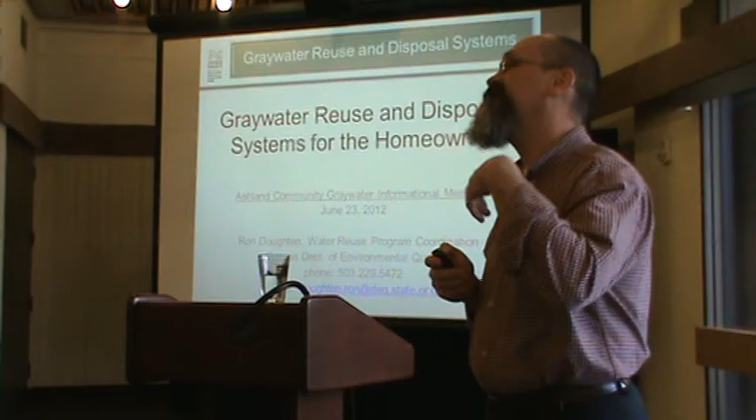And hopefully you will know other places to go and get resources. That's really what I'm hoping.

So very basically, what we're going to talk about is there's a couple of things you need to know before you even get started, and then I'm going to give you 9 steps to reusing Graywater.

I've also put a key on here. The key is important because, as I mentioned, you have to get a permit from DEQ, and places where I put a key are things you actually have to put on that permit application. I highlighted those so you know what you'll need on your Graywater permit application.

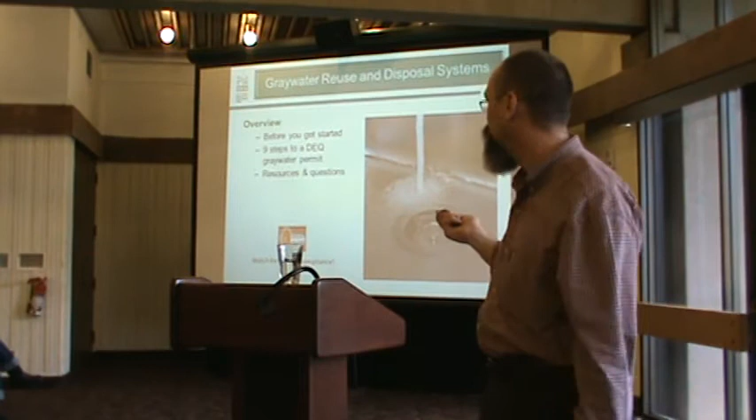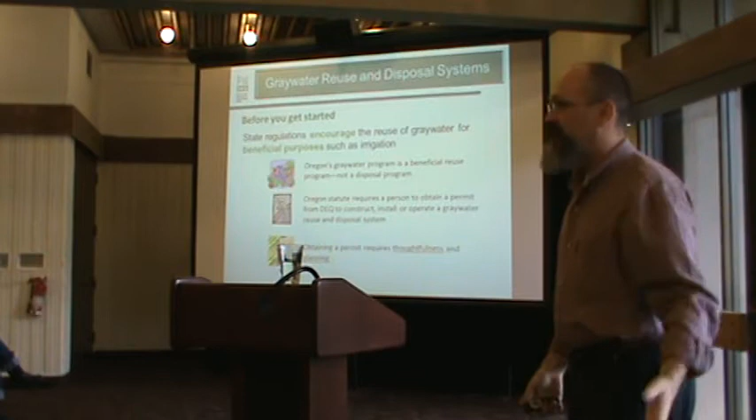All right. So as I've already mentioned, it is state policy to encourage Graywater reuse. The things you need to know: first, this is a reuse program, not a disposal program. I've had people contact me who have a house in the hills and can't qualify for a septic system, and they want to put in a Graywater system. I can't help you, because this is a reuse program, not a disposal program.

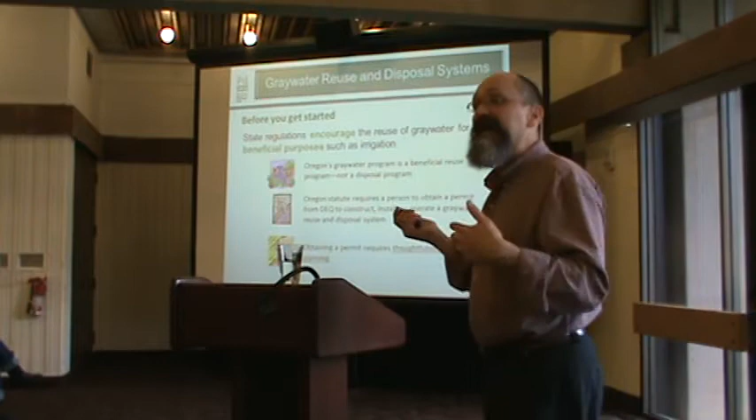The second thing is that you have to get a permit, as I've already mentioned. We're trying to keep that permit easy and basic to get, so it's not very onerous. And lastly, getting this permit and going through this process, we're trying to make it very simple, and I think it's actually pretty straightforward and easy. Sometimes it's going to sound complex, but I don't think that it is. It just requires that you're thoughtful and do some planning.

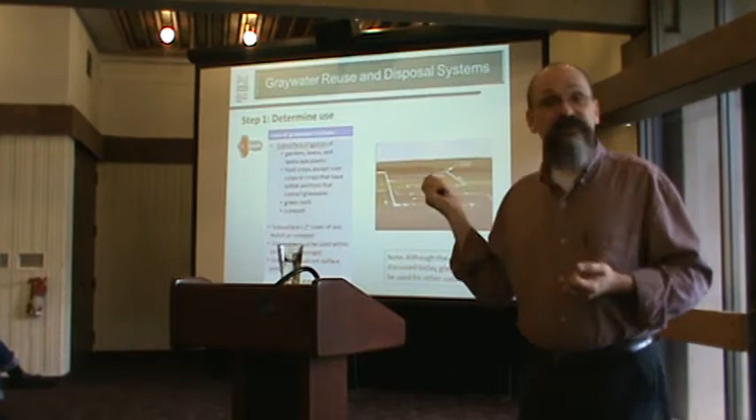Okay, we've already covered this. Subsurface irrigation: on your permit application, there are 4 things under subsurface irrigation that you have to choose, and on your application you actually have to identify which of those you're going to do. It doesn't mean a whole lot of difference if you check one and not the other, it's just that we ask that you do that.

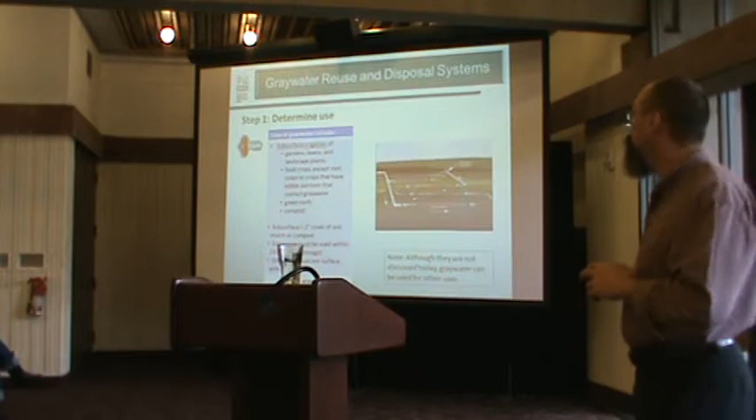You can check more than one? You can check more than one. Yeah, you can choose, like if you have 2 different sides of your house. Absolutely, you can choose one or all 4 of those different ways of reusing Graywater for subsurface irrigation.

Once again, the reminder: 2 inches of cover. We try to keep that very simple so that if you put in a system and want to move it, you can find your hoses, pull them up, and move them. That's for people who want to do vegetable gardens and things like that. And the Graywater 24-hour limit is something to keep in mind as well.

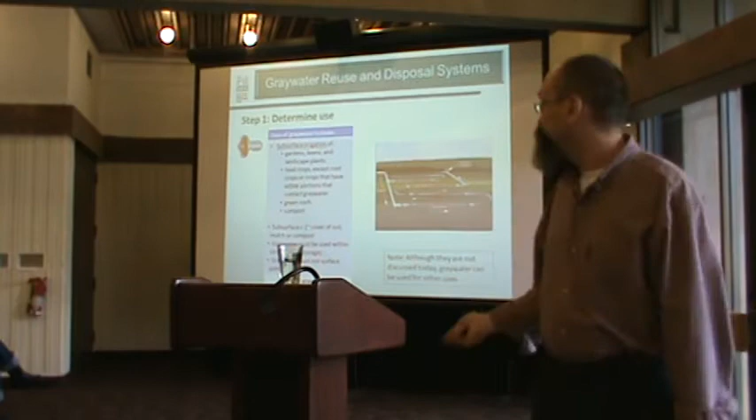All right, here's our key. So, second step: you've determined how you want to use it. The second thing is to figure out where you want to use it. I've gone through some of these already.

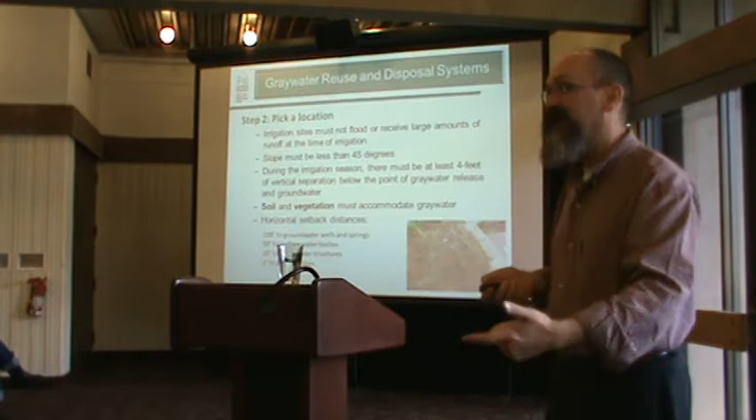So the site you choose can't be subject to flooding or on-site runoff at the time you're using your Graywater. If you're using it in the summer here, barring heavy rains like yesterday, you shouldn't have any problem reusing Graywater in the summer naturally.

Are all of these kind of requirements in the permit, or should we be writing this down? All of this stuff - there's a handout called Reusing Graywater in the Landscape. Everything should be in there. Okay, great. Yeah, including the 9 steps. Okay, it follows that very closely.

Don't put it on steep slopes. Slopes have to be less than 45 degrees. That's pretty steep.

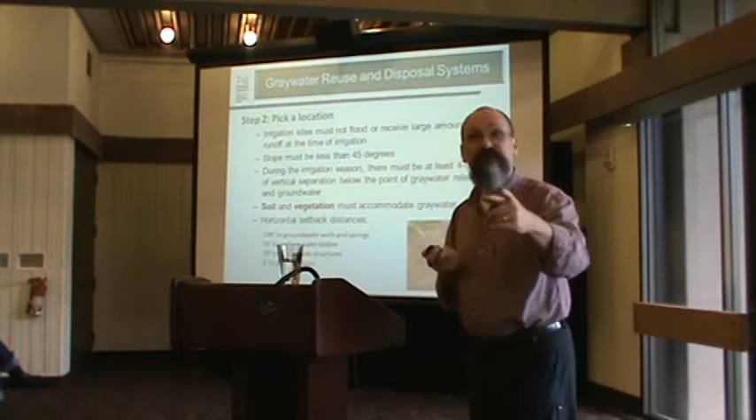During the irrigation season, there's the 4-foot separation - I think that was asked a little bit ago. And your soil and vegetation must accommodate your Graywater, so you just have to have an idea of how much water your plants need and make sure that area can accommodate it.

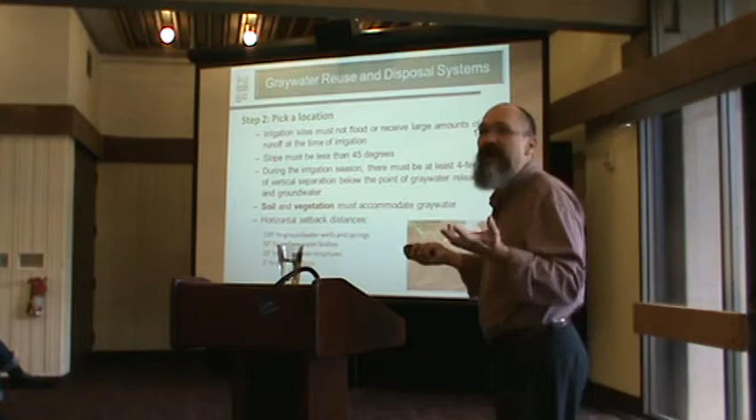We've had people talk about their little planter boxes, wanting to put 100 gallons per day in it - you can't do that, so it's just practical. For the slope less than 45 degrees, is there a reason? Yeah, the issue there is stability. Once again, this isn't about irrigation being the focus, but there are concerns because it's subsurface and you can't tell when it gets too saturated, so it's just a slope stability issue.

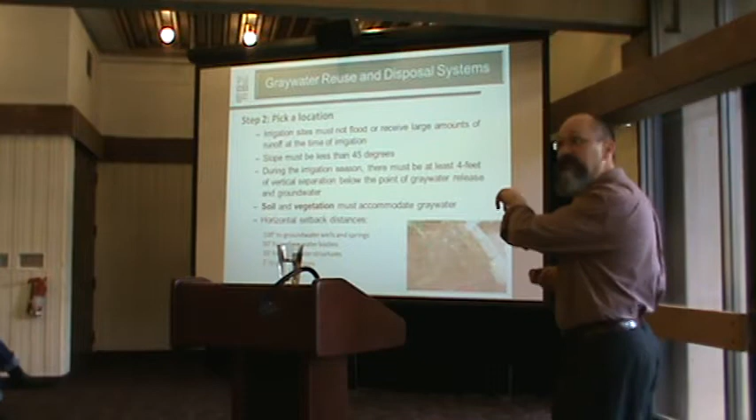There are horizontal setback distances to what we call sensitive features. If you have a well on your property, that's 100 feet; 50 feet to surface water bodies, so if you're near a stream, bear that in mind. 10 feet to stormwater structures—again, you're just trying to keep the graywater from getting into the stormwater systems—and 2 feet to property lines.

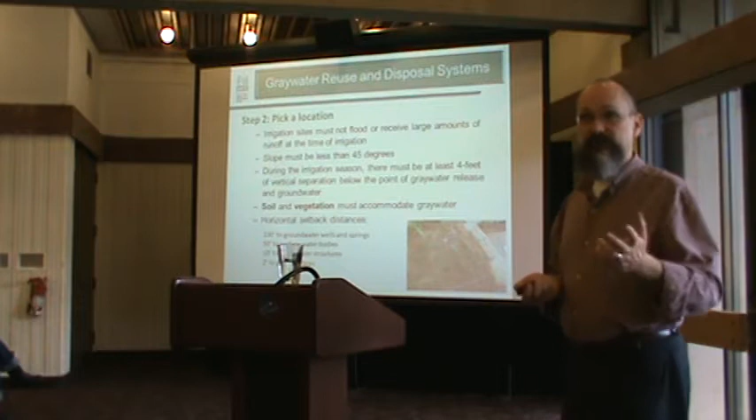Now, you can cross property lines if you generate graywater and your neighbor wants to reuse it—you just need an agreement with your neighbor. Or the other way around: if your neighbor is generating the graywater and you want to reuse it, you can do that too, but you need a written agreement.

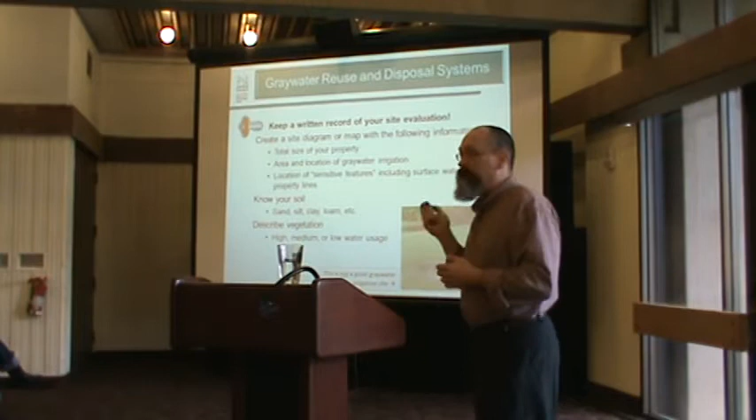So, keep a written record of your site evaluation. This is just something that says create a map or diagram of your property, know your soils, describe your vegetation. Keep this very simple. This is where resources like soil and water conservation districts can be very helpful, particularly for soils, helping you know what types you have.

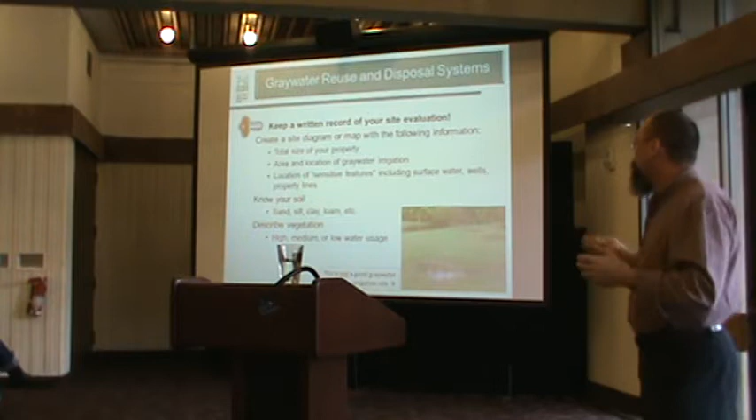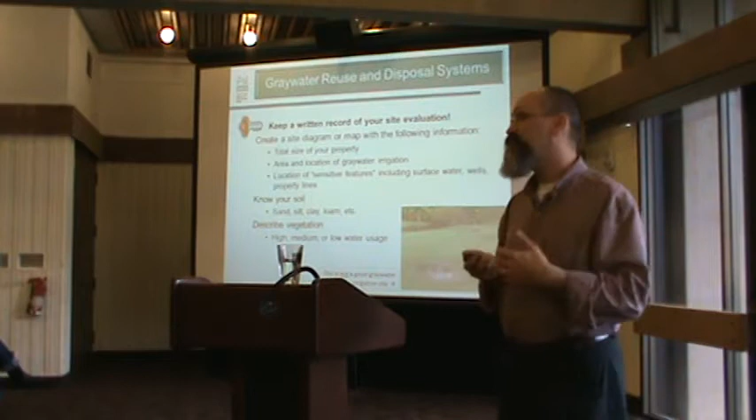Talk to people—landscape professionals, talk to nurseries. If you're putting in new vegetation, how much water do those plants need? As a general rule of thumb, lawns in the summer in Oregon need about 1 inch of water per week, and you can base how much water you need on that.

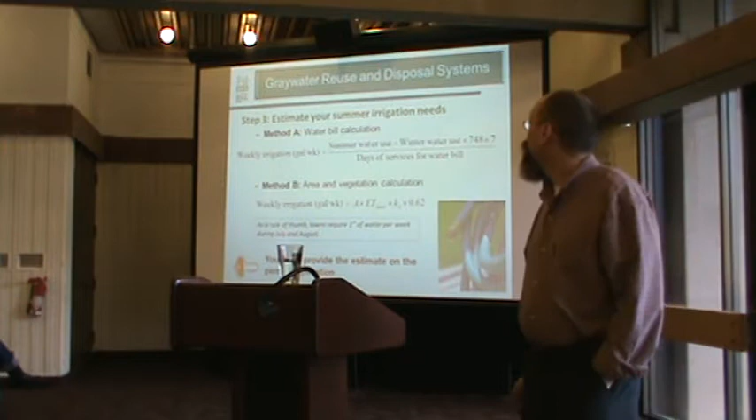So the next step is to estimate your summer irrigation needs. Again, this is much simpler than it looks. There are a couple of ways you can do this.

If you have an existing structure and want to know how much water you need to irrigate your landscape, you can pull your water bills. The difference between your summer and winter water bill can be used to calculate how much water you need for irrigation in the summer. So that's one way to do it.

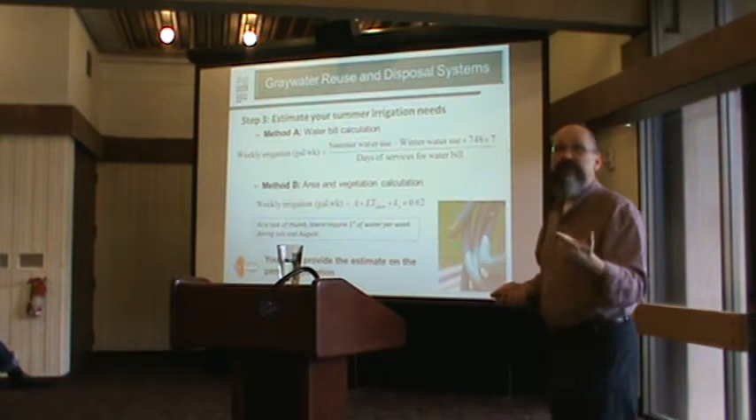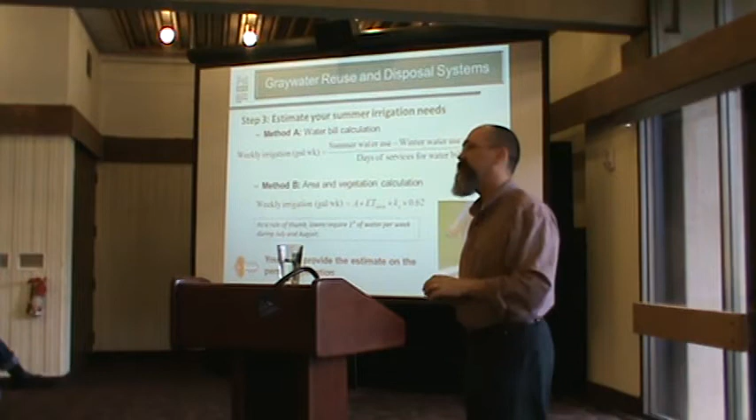The other way to figure out how much water you need for irrigating is to actually do a calculation based upon the area, the amount of water transpired by the plants, and some factors to get it into gallons per week. There are people out there who can help you do this if it's complicated, and I think the guide talks about ways of doing this too, with examples. It really isn't that difficult to do.

You speak about lawns, which I'm not really in favor of anyway. Right, but you say nothing about just keeping your lawn higher, so it would use less water.

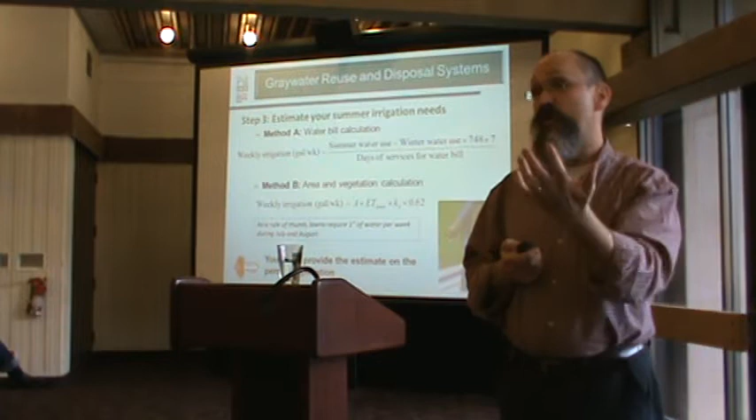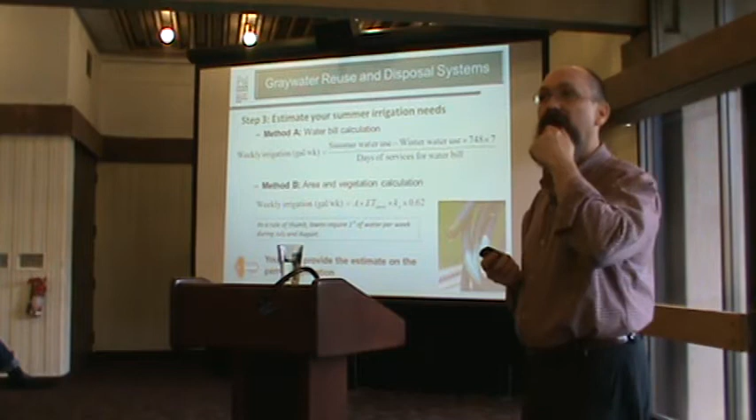Well, that's true. I bring up lawns only as a point of reference, because one of the tools people often use talks about how much water you need to put on your lawn. Like in the Portland metro area, there's a website where every week you can put in your zip code and it tells you how many inches of water to put on your lawn. You can use that number to calculate how much graywater you need—that's the point of using the lawn as a reference.

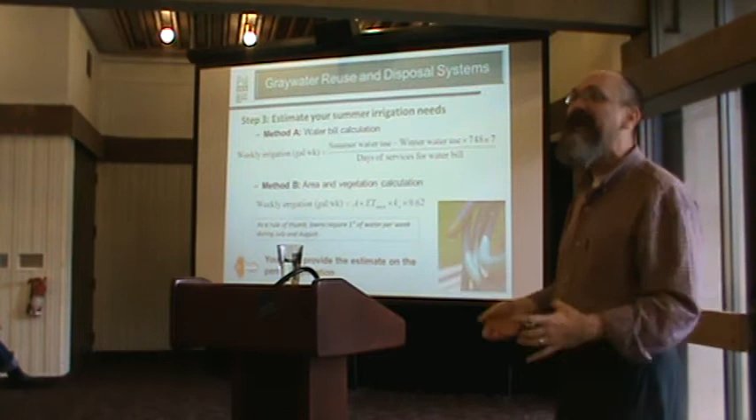I read that if you just collect your water in a bucket and use it that way, you don't need a permit. If you move it inside your house, I mean—if you use it inside, yes, you can't take it outside. That's the strange thing: when the legislature passed this law, it was for taking water outside of your house, so it doesn't specify how you get it outside. We assume most people will run plumbing, but technically, if you have a bucket and you're taking it outside, that is permitted.

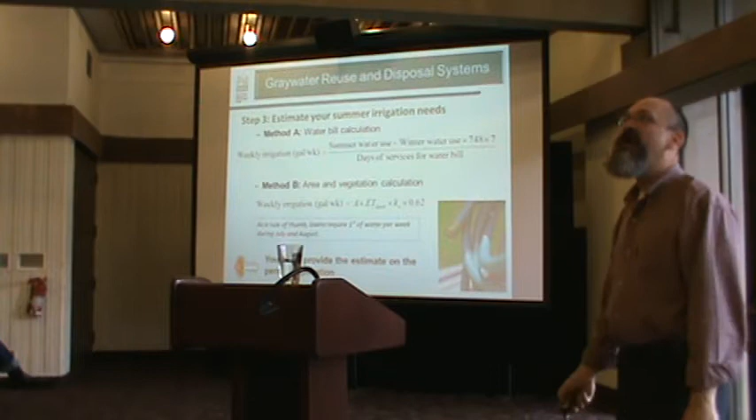This estimate of how much gray water you need doesn't have to be precise. It just needs to be a ballpark, like estimating that you need 70 gallons per week to water this area in the summer. That's it. These can be pretty big, general numbers.

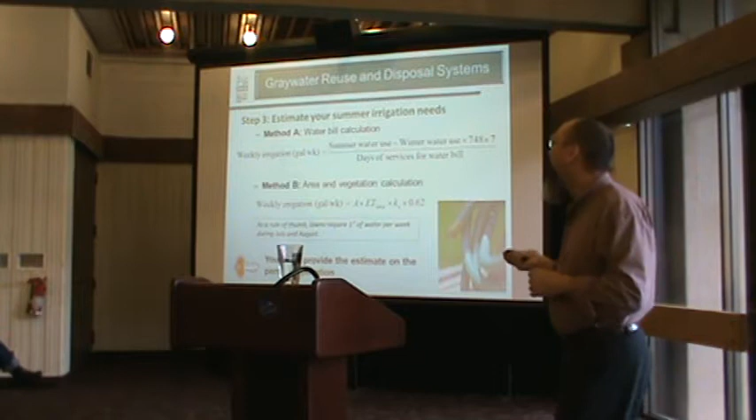Question: are there any state, county, or city incentives at this point to influence people? No, not yet. Are they being talked about? There's nothing that DEQ can do on our end, unfortunately.

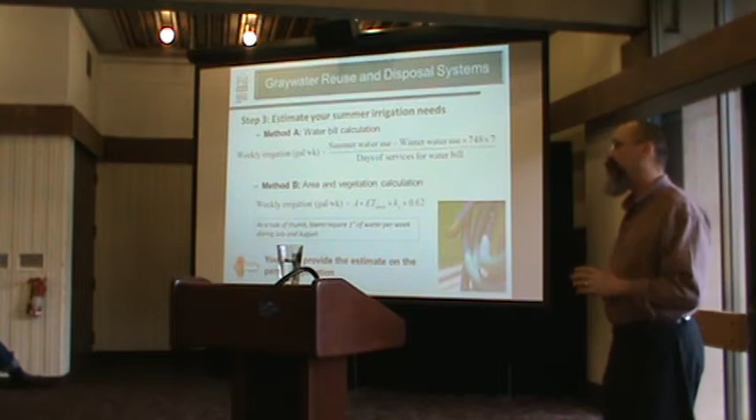The only mechanism we have is to deal with fees, that's all I have to play with, their permit fees. So we've tried to do that by waiving the annual fee in most years. That's how we're trying to help, but our hands are tied. If you're looking for incentives locally, you'll need to talk with the local jurisdiction.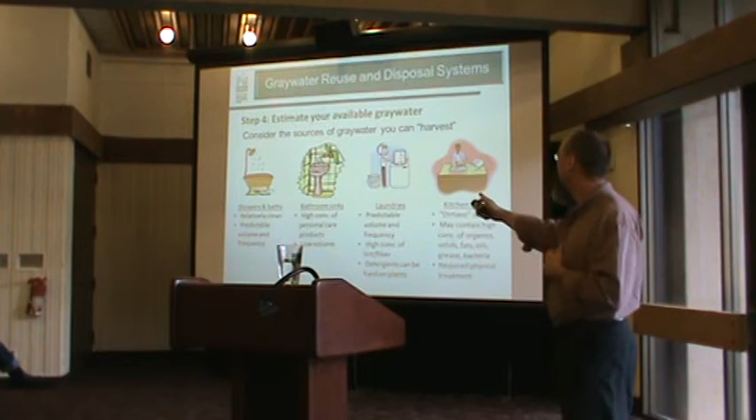So step 4 is estimate your available gray water. Once again, there are four different sources. Two of them are really good and easy to do: showers/baths and laundry, because they're so predictable, and you'll know how much water you produce from those. Estimating your gray water flow is a pretty straightforward process.

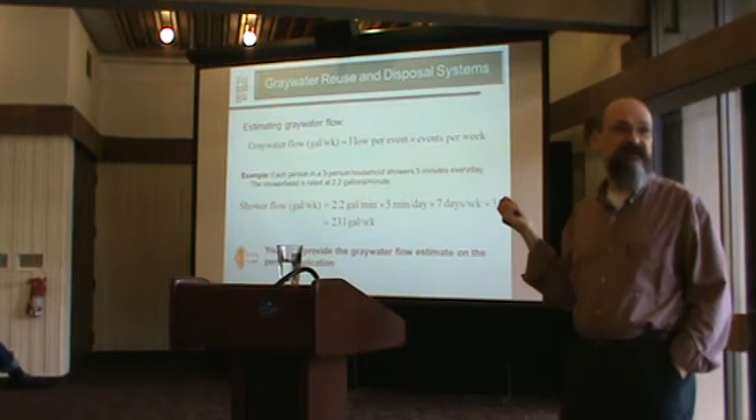The idea is how much flow you have per event, and how many times that event occurs every week. For example, 3 people showering 5 minutes every day with a shower flow of 2.2 gallons per minute comes to 231 gallons per week. It's a pretty basic math calculation.

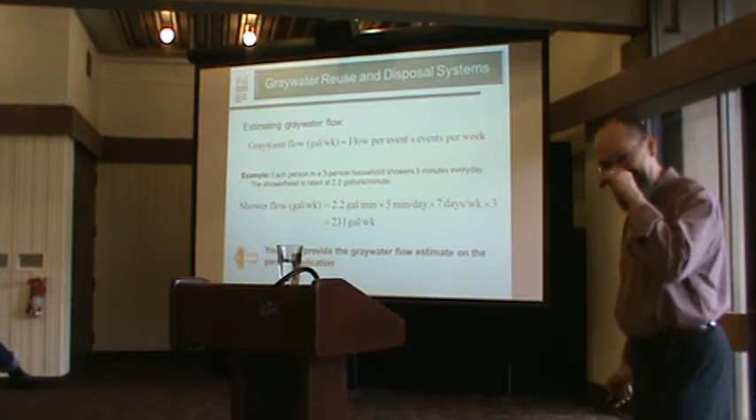What's a full bathtub? I don't know, you'd have to figure out your bathtub. Do you know? No, I wish I did.

Once again, that number does go on your permit application. It's ballpark, it doesn't have to be exact or precise.

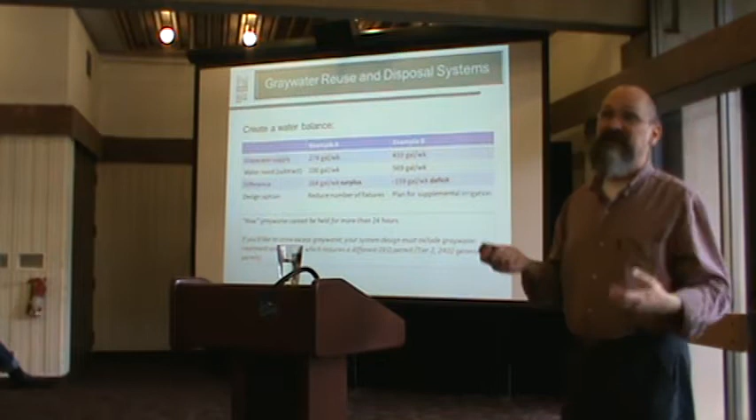The next step is to compare how much water you need to irrigate with how much gray water you're producing. Just look at those two numbers. In some cases you might have extra gray water, in which case you might decide not to collect from your bathroom sinks, reducing the number of fixtures on your gray water system. Likewise, you might find you need more water than your gray water produces. That's okay, you just need to plan for supplementing it, using some potable water supply if needed.

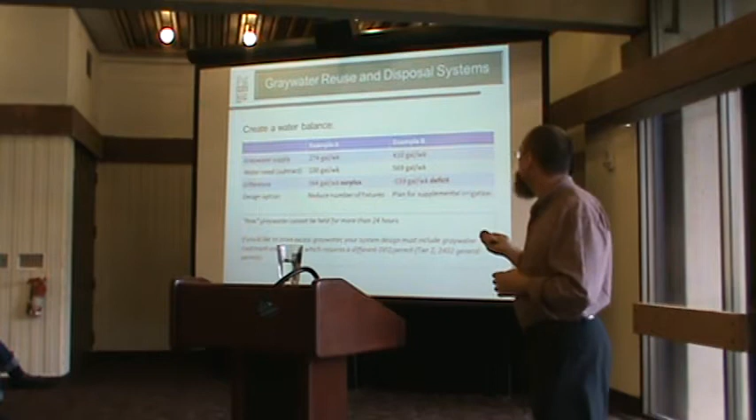Step 5: design your gray water system. You've collected all this information together, and now it's just a matter of putting it down and figuring out what it's going to look like, so you know which fixtures you're going to use.

You need to have some kind of diversion device, a way to divert the gray water from irrigation to the sewer system, assuming you're on a sewer. Where are you going to put that? Where will it be located in your house? You can have one diversion device, or a diversion device at every fixture in your house. It's up to you to decide how you want to do that.

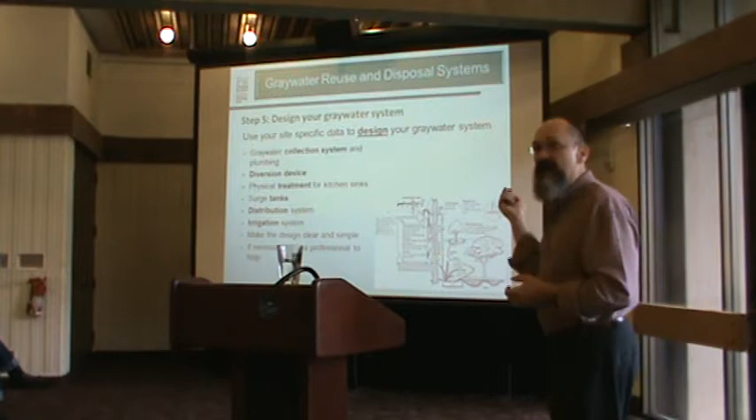If you have the kitchen sink, we talked about having some sort of physical treatment process, something to think about: where is that going to be located? Are you putting a grease trap under your kitchen sink, or putting something outside your house? These are all design considerations you need to think about if you want to do kitchen sinks.

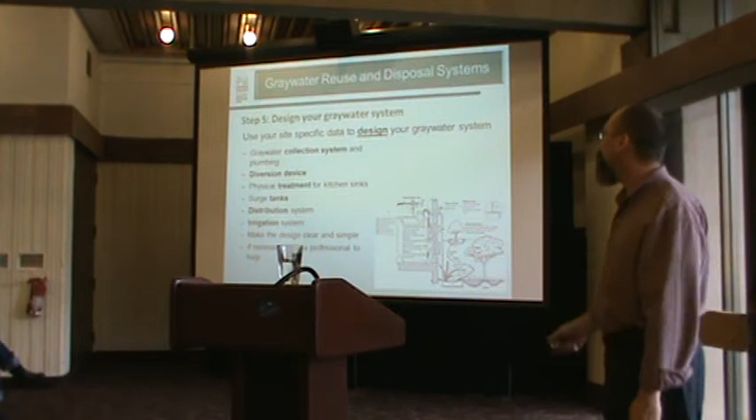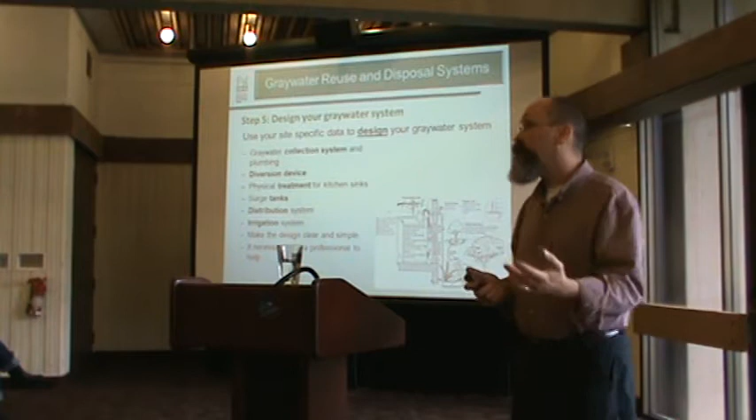You can't store your gray water, but you may want to put in a surge tank, maybe a 55-gallon drum, since your washing machine pumps out all this water at one point in time, and it's maybe hot, so you want to slow it down and let it cool before putting it out on your landscape. You don't have to, but you may want to. It's just something to consider.

For your distribution system, the idea is just to think about how you're going to get the water from the house out to wherever you're going to use it.

Are you going to do buried pipes, or are there different ways to do that? Going back to the diversion device - I've got a very small crawl space, and I'd like to have an electrical switch so I don't have to crawl into the house to change that. Is that doable, and any idea how much that would cost?

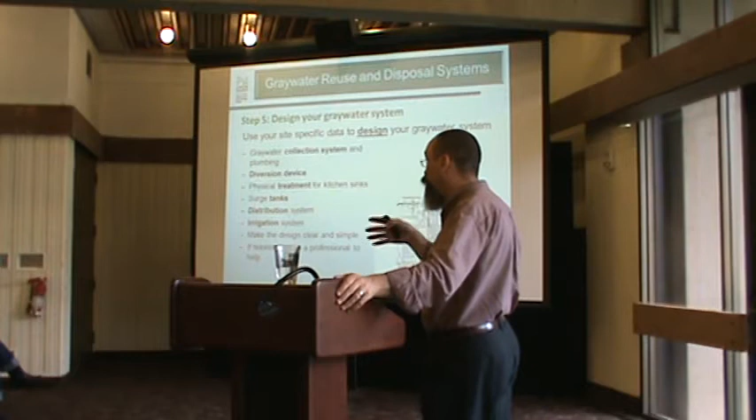I don't know how much it's going to cost, but if you can control where that flow goes, as long as your ability to control it is readily accessible, I think that's fine. The idea with diversion devices is that it should be readily accessible. There's that thing about crawl spaces - if you're washing dirty diapers and you need to send it to the sewer, you don't want to crawl into your house to switch that. So there's some way that you can do that.

So, system design. There are lots of things to think about, but they're pretty practical things.

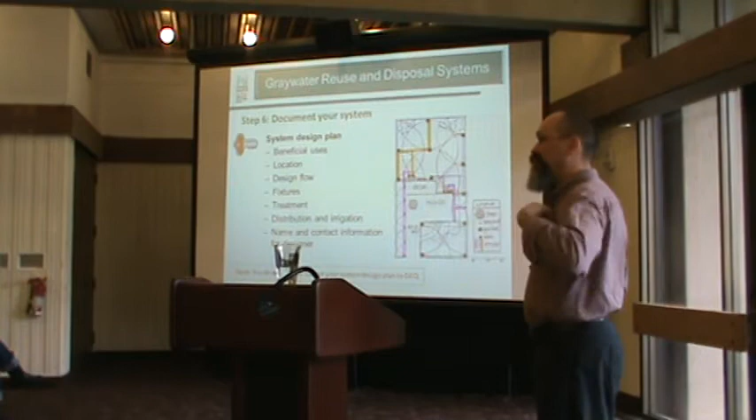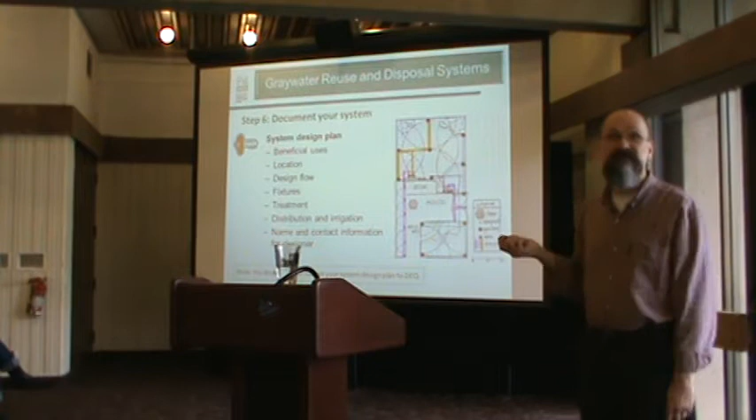Document your system. This is a requirement for getting the permit. You have to document - there are two documents that you have to create. I'm not going to look at them, and nobody from DEQ is going to look at them unless there's a problem, in which case we could come to you and say, show us your documentation. But you do have to have the documentation, and the idea is this is a thoughtful process - you've planned it out. If you've collected all this information about your system and designed it, you put it into something we call a system design plan. That's all it is - it's just documenting everything that you've done at this point in the process.

The second thing you need to document is an operations and maintenance manual. This just tells somebody how to operate the system.

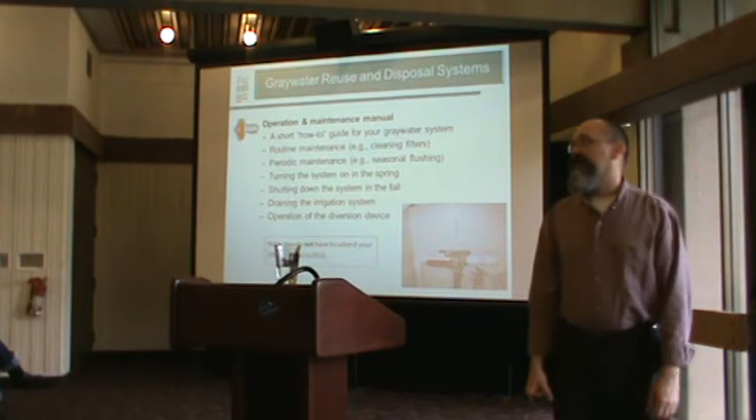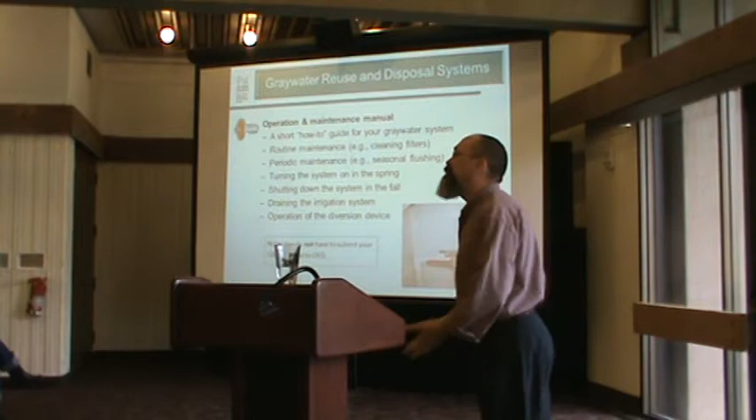Where are the filters located? How often do you have to clean the filters? If sediment collects in your surge tank, do you clean it out periodically? If you're going away on vacation for a month and shutting down your system, are there things you have to consider? Again, how do you operate the system, and if somebody else is going to be using it, will they know how, if there are any complexities? Once again, I'm not going to look at this, but it's something you should have for your operation.

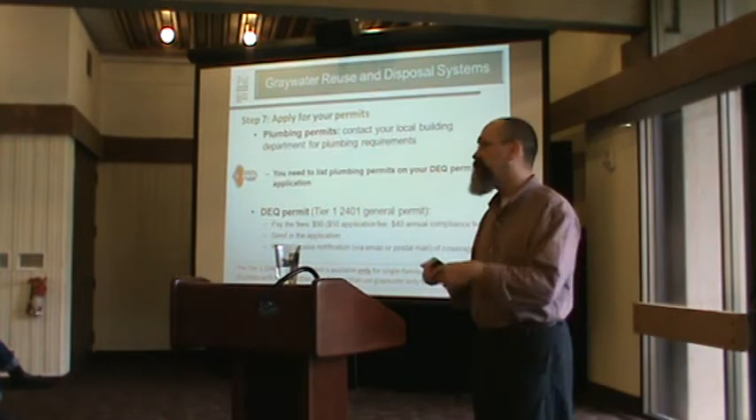Step 7 is to actually apply for the permits. The first thing you have to do, if you are going to modify your plumbing - so if you've got the bucket system, you don't have to modify your plumbing or get a plumbing permit for that. But if you're cutting into your plumbing, you have to get a plumbing permit. That's the first thing you have to do.

When you apply for your DEQ permit, you will have to list and let us know that you've got that plumbing permit - that's one of the things we're looking for. If you didn't have one, if you're doing the bucket method, you can say not applicable in that portion of the application.

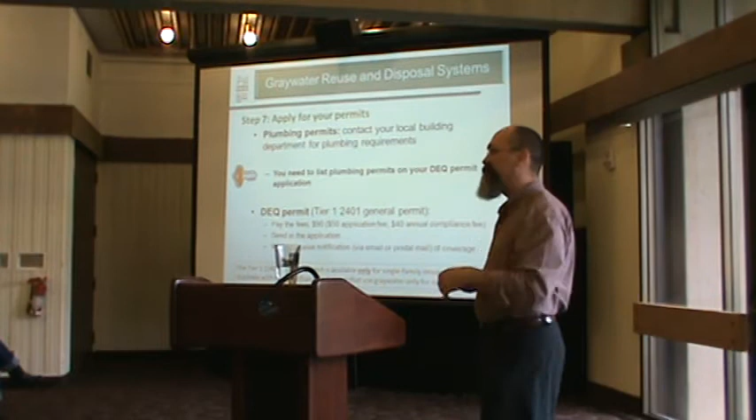So the permit application - I did not bring any of these with me, but those are available online. I think the actual portion you fill out looks like this. It's fill in the blank - that's really what it's all about.

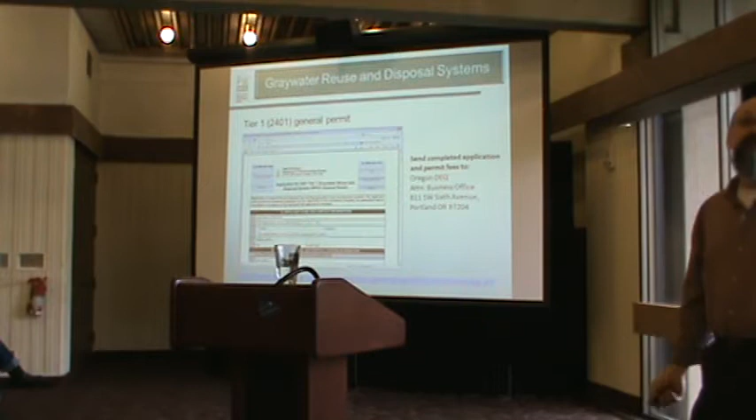One of the things we're looking for is to make sure your application is complete. We think these subsurface irrigation systems people want to use in their yards are a pretty low environmental risk overall, so we're really leaving it on you as a homeowner to design the system, or work with somebody who designs systems, to make sure it will work. We're trying to keep this very, very simple.

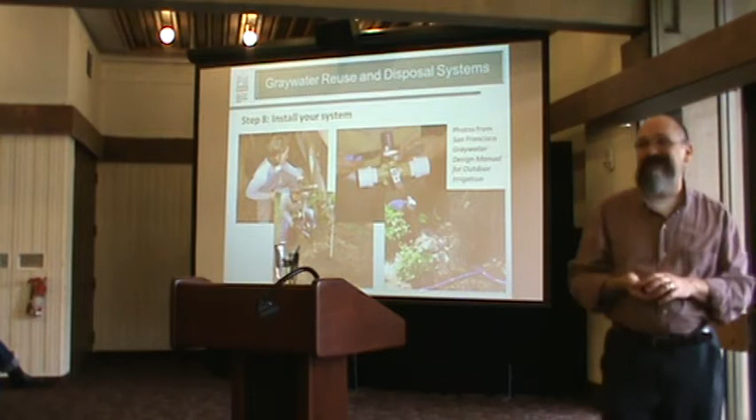Step 8, once you have all of this, install the system. How you do this and who does it is entirely up to you. These systems can be pretty basic - one has some sort of drip irrigation, and then you've got somebody with a mulch basin around a tree, where they've run some graywater lines around the tree. It can be a pretty basic system. The idea here is that we're just covering it.

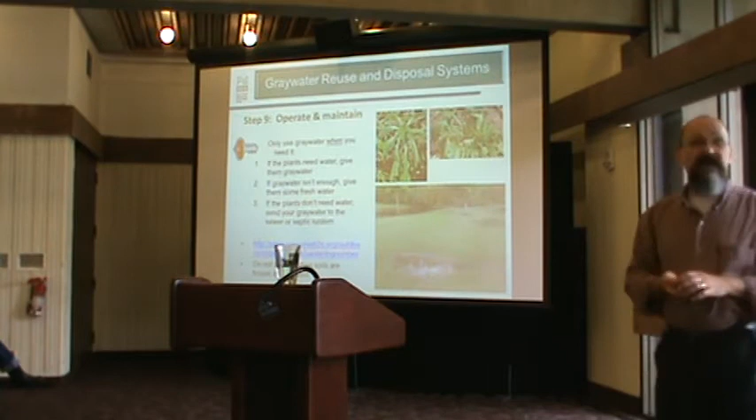So you've got your permits, you built your system, and now you operate and maintain it. One thing I've heard a lot from local city officials and people involved with permitting on-site septic systems is that they tend to be the most nervous about graywater systems, because they have a lot of experience with homeowners who put in a septic system and fail to maintain it. So the concern from local jurisdictions and public officials is that people will put in graywater systems and not realize there's maintenance involved. I think the maintenance can be pretty basic, and I want to remind you of some of it.

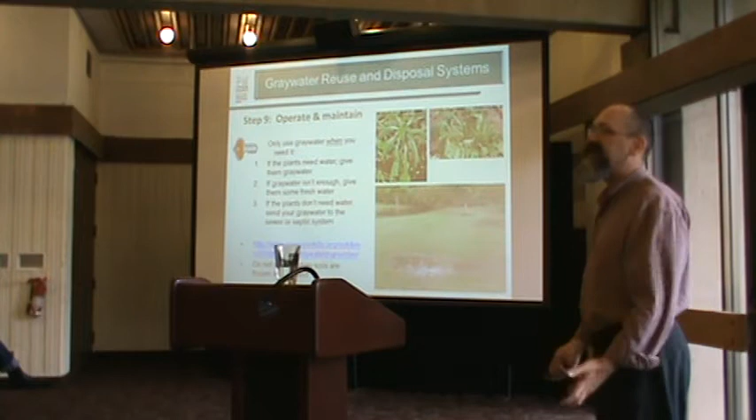The first one is use graywater when you need it. If the plants need water and look like they're wilting, give them some. If they don't need the water, don't give them water. It's a pretty basic way of operating the system. Don't irrigate if your soils are frozen or saturated - basic idea there.

We've been through this: avoid products that contain salt and sodium compounds, avoid things that will cause problems in the landscape. Basic maintenance ideas - find biodegradable soaps or good soaps you can use. Don't put out the nasty stuff.

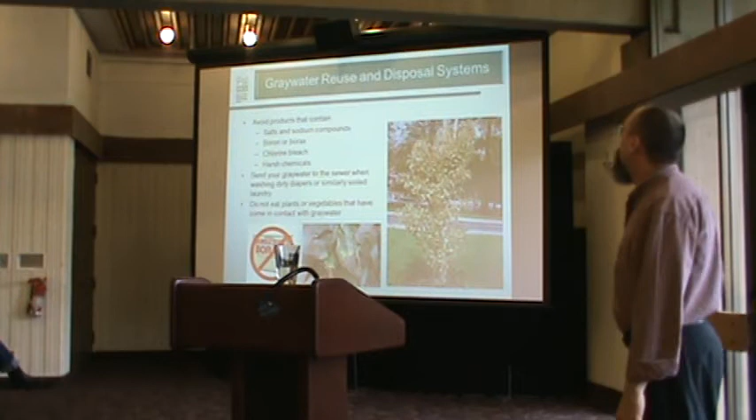If you're washing dirty laundry, somebody's sick in the house, if you're rinsing paintbrushes or doing things you don't want out in your landscape, send that to the sewer. That's one reason there are centralized wastewater treatment facilities - they have bigger capabilities for treating wastewater. Do not eat plants and vegetables that have come in contact with graywater.

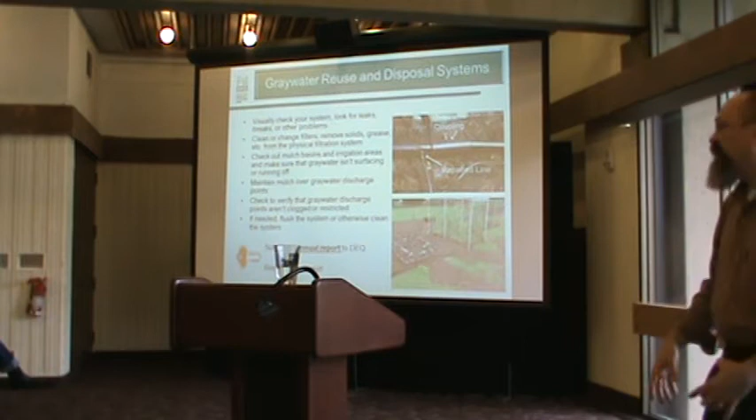Basic stuff. Other things about operation and maintenance: visually check your system periodically for leaks, breaks, or other problems. Change the filters when you need to. These mulch basins - if the mulch breaks down over time, or if you have a flood event or winter conditions, it could wash away some of your mulch. Just go back and put mulch back around it. Basic maintenance ideas.

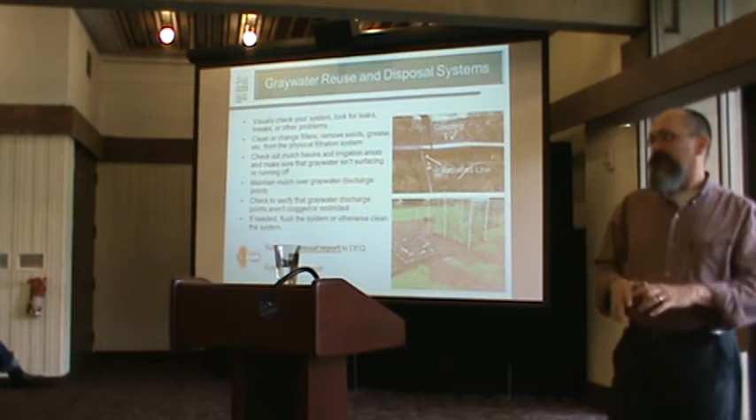Flush the system periodically if you need to. And the last piece - I've mentioned that one way we're trying to incentivize people to adopt or look at graywater is we're going to waive that $40 annual fee 4 out of 5 years. The only trade-off is we'll have a fill-in-the-blank form on our website that we'll ask you to fill out and send to us. One reason we're doing this is just to give you a reminder that you do have to maintain the system over time.

Do you send out an annual reminder, or do people need to remember themselves? We will try to send out an annual reminder. On the application there are two ways - you can give us an email address or a mailing address. You just need to specify on the application form how you want to be contacted. I would much prefer email, but if you want snail mail, you can have it.

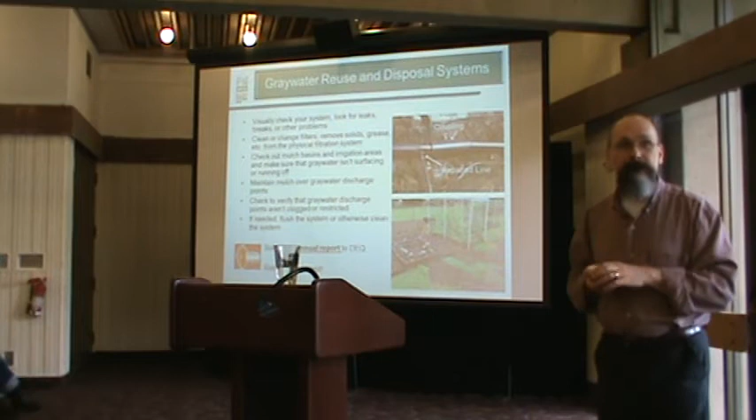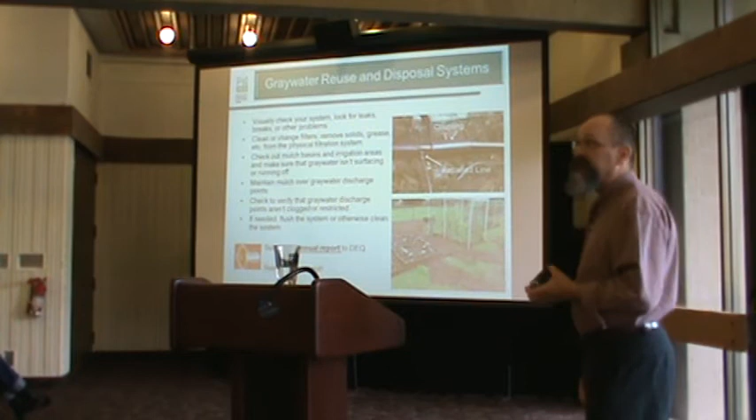In a property transfer situation, will the new homeowner be required to maintain the system, or void or vacate it? Yeah, so if you sell your property, one of the things on that declaration form is you have to declare if there's any on-site systems. Typically we think of that as a septic system, but technically this is classified as an on-site wastewater system too for legal definitions. So you have to declare a graywater system on that form when you sell your property, and the buyer has to decide if they're going to keep it. If they don't want the system, they have to abandon it. We haven't created this yet, but there'll be a way to notify DEQ that the system is being abandoned and you're removing the graywater diversion device - that's how you abandon the system.

Your statement about using the water that's needed makes a lot of sense. But at the same time, my experience has been that we've had a wet spring, but you go outside and dig down an inch, and you're in dry ground. My thought would be, why would I not want to have water going onto my cedar trees, redwood trees, on a year-round basis? And would there be a problem with that?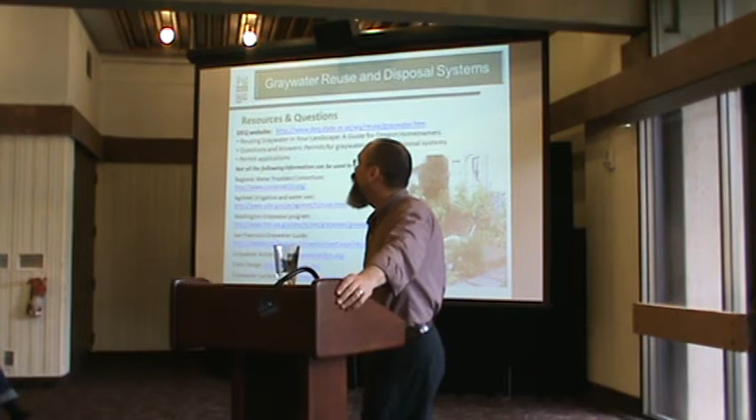The way that the program and our rules for reuse were written is that you can distribute water into the environment when evapotranspiration exceeds precipitation, which is a fancy way of saying if rain isn't meeting the water requirements for the plants, you can put out your gray water. If rain is sufficient for watering the plants, then you can't.

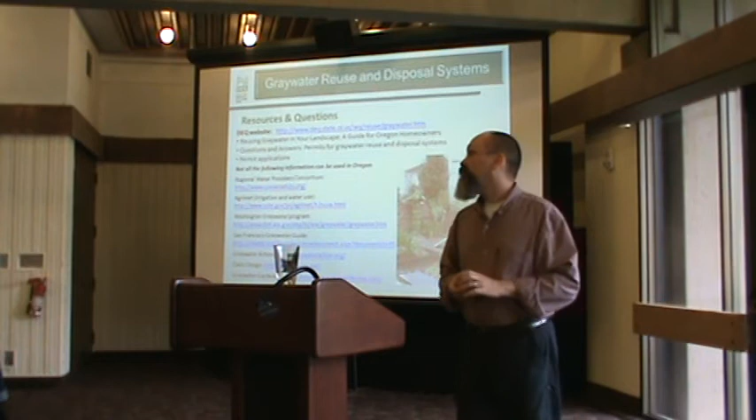So there's a lot of people who would like to put the water out year-round, and there was a lot of discomfort around doing that because ultimately that water will migrate into groundwater, and there's just been a lot of concerns. So the basic operating principle is use it when you need it.

I'm curious, all the steps seem really straightforward except designing the system itself. Do you have a list of local experts who can help you do that?

I don't have a list of local experts who are doing that. I know that unfortunately somebody from Graywater Action was going to be here and talk, and I wish that they had made it. But I know Graywater Action has training classes for people on how to design and install these systems. Is there a way to know if a plumber has had training or has really good local examples? Not yet.

Maybe I can answer that, because that's actually what we're starting here - that's the plumbers over there. What we're planning to do is work with Jackson Soil and Water to come up with that list. This is new, so it's going to take a little while to get going, but hopefully within the next 6 months or so we can have a list of the plumbers that have received some sort of gray water training and are familiar with the system.

I also would say, I've been wanting to get out and see systems. People don't want to show them to you because they're illegal. One of the ways that I know what's out there and what works is by people actually showing me the system. I'll take off the DEQ hat.

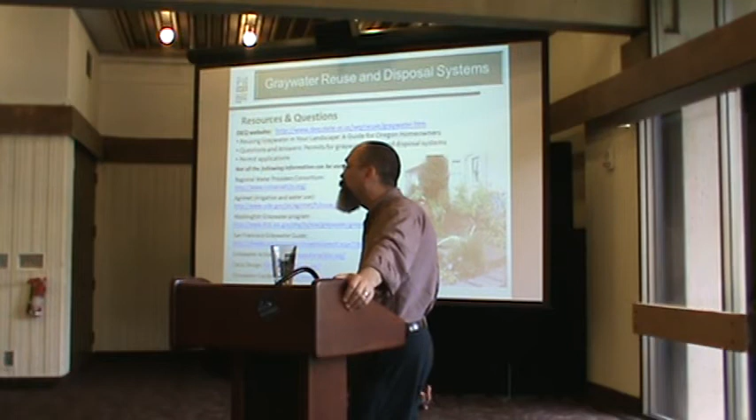On that same line, you had requested that we present systems to you. Are some of those systems that other people have submitted available to look at to get ideas? In terms of at this point, they're submitting their system for approval to you - is it available for us to look at some of their systems that they've set up?

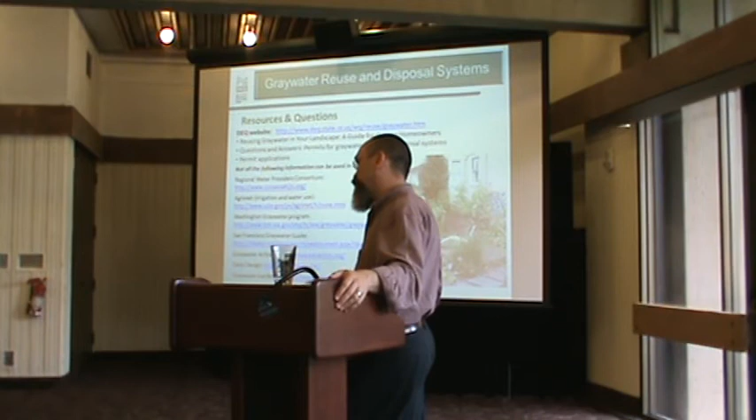For this very basic permit, we don't take plans. All we're taking is the permit application, so you keep the plan. I don't have copies of plans for that. Yeah, so if you do what we call a tier 2 permit, for treatment systems, then you do submit that information to us.

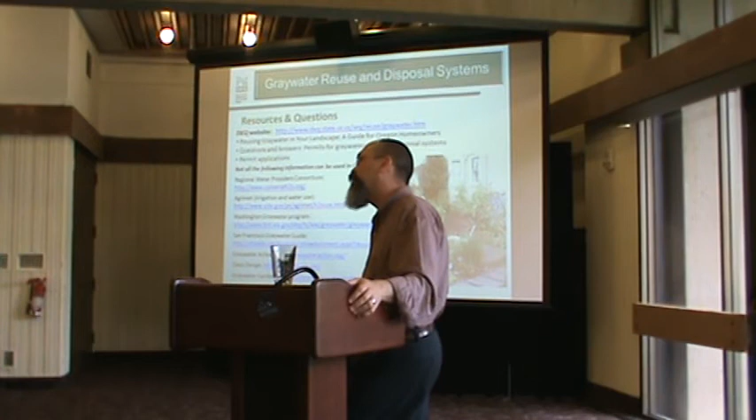Is that available for others to view previously submitted forms to get ideas? I suppose legally, yes it is, but there's not going to be an easy way to do that. I would say people are going to be uncomfortable if I'm just handing out all the information or posting it on the web, so people won't be comfortable with that. You could do it through a public records request, but practically, I'm really going to rely on this - this is where I really want to see local people get involved. That's why I was excited about this.

This is the first time the community has really said, hey, we want to start putting in graywater. I think your greatest resources are going to be here, and this guy is going to help facilitate this. You're going to get examples, know what's going to work, and people will know what the soils are like in certain areas. I think it'll work here.

Well, for one thing, the San Francisco Graywater guide has some examples, and if you Google it, you can actually find people who have worked on this.

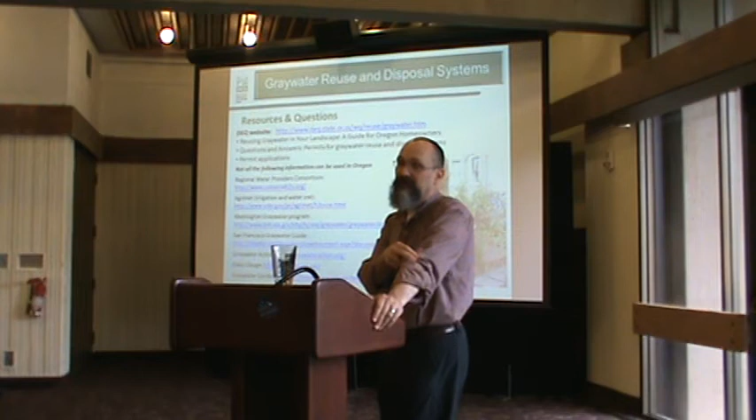But I wanted to stress this man's question about putting year-round water on, how different it is. I live right down the hill here, and in the winter—not this year, but last year—the water table was at grass level, lawn level. That's where it was during late spring, and in the summer, it's gone, you can't find the water. So that's the soil differentiation in Ashland alone. I have friends on Clay Street, and it's clay there, so year-round they have a high water table.

So it's really important to assess your local situation, right where your household is. Exactly, and that's why I've tried to put this into both presentations. You've got to know your soils, know your plants, know your site.

So if I was trying to get rid of more water, or not put so much out in the sewer, I could just plant plants that need more water during that time of year. That way the plants are using the water before you put it out. Yes.

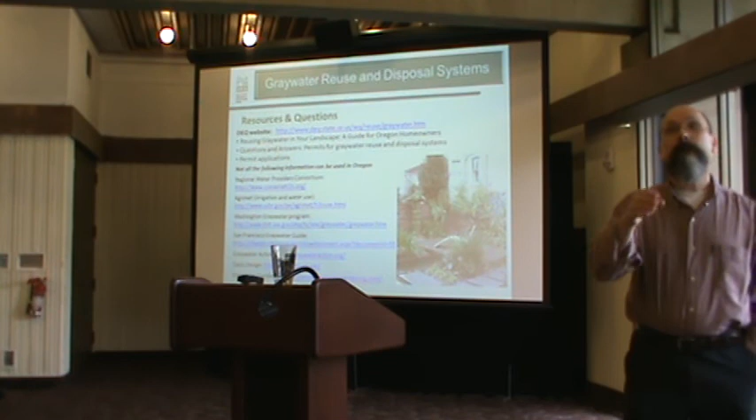Do any cities keep track of how much sewage flow they have, so that if there's a lot of graywater use in the city, the flow to the treatment plant would diminish? So all cities with treatment plants have to keep track of their flow, so that's something they are already doing.

There have been studies done so far looking at whether graywater actually makes a difference on those flows. Right now, no—it's not significant because there are too few people actually putting in graywater systems. I would love to see that change.

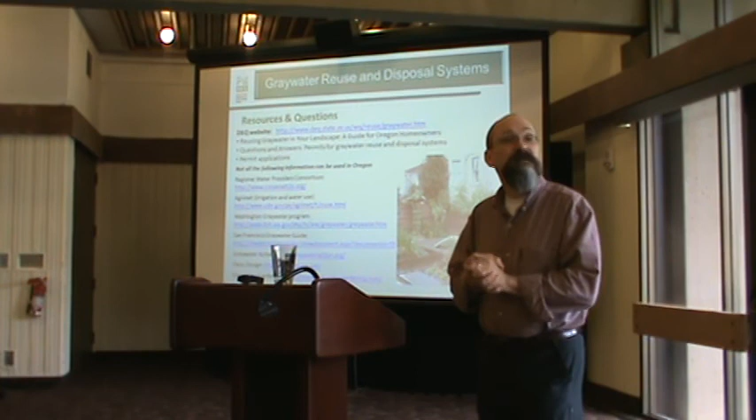The reason the Conservation Commission and Division of the City of Ashland put this event on is our hope that over time we can affect how much effluent we're sending out to sewage treatment and the creek on an annual basis, but there's no measurement for it on this end yet.

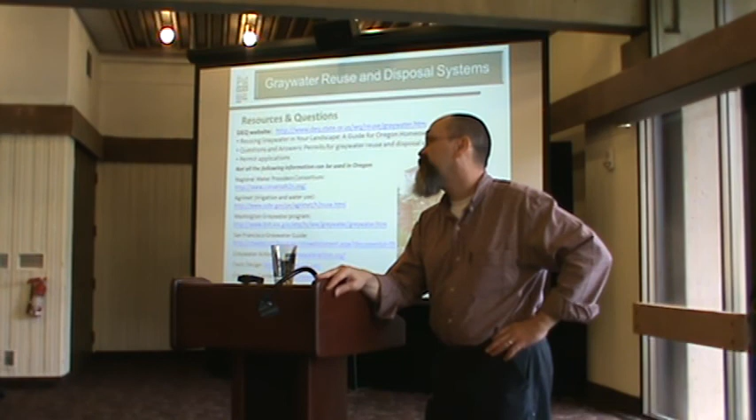No, and it's going to be a while before we actually get to the point where you can see a difference, but I think it's possible—I really do. I think one of the benefits of this graywater program is that it improves water quality at the wastewater treatment plant at that end of it.

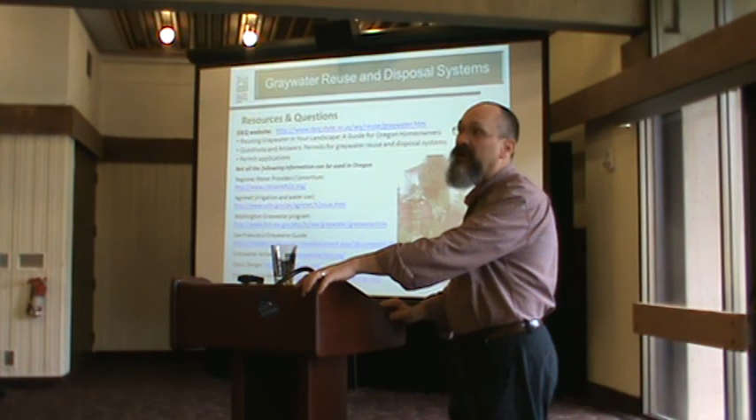I know there are lots of people who really want to get completely off the grid and don't even like using wastewater treatment facilities. I appreciate that viewpoint. I really stress that I think there's a place for both types of wastewater treatment, especially in our urban environments, so they kind of go together.

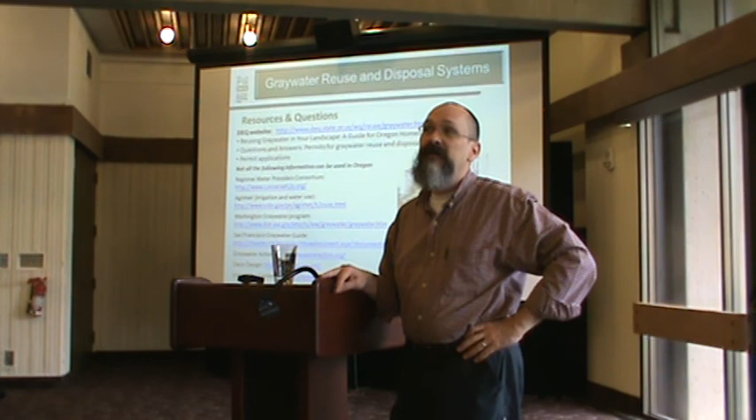Other questions? Does the city or anywhere have a map of soil types, just the overall picture? Yeah, this is where the Jackson Soil and Water Conservation will be a great resource, and the county has that. One thing I'd say is the soil maps are often pretty general, so you often have to do site-specific investigations. And when you're in a city, the soil has been so disturbed it's difficult to know if what's mapped is really what's there.

But really, this should be pretty simple—you can go down to the level of saying this is a such-and-such silty clay loam with an infiltration rate of such-and-such. Yeah, that's more detailed than we're talking about. Is it a clay? Is it a loam? Is it a sand? Design your system appropriately based upon it.